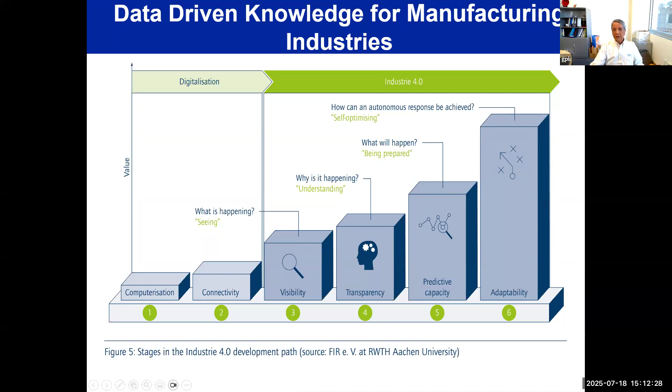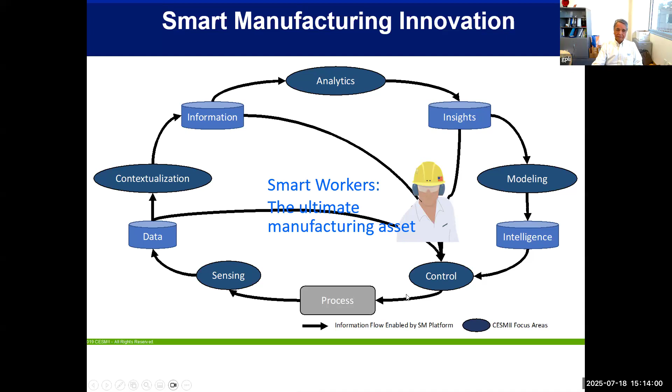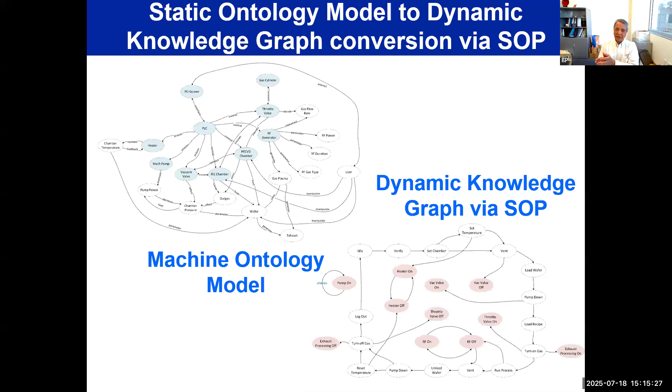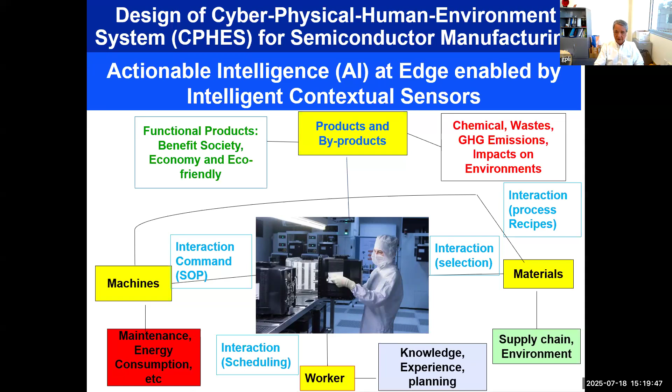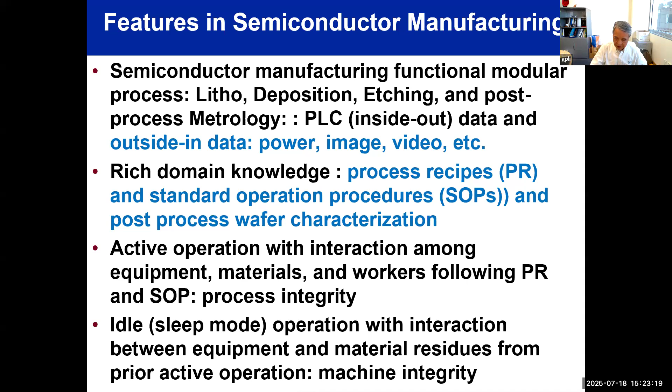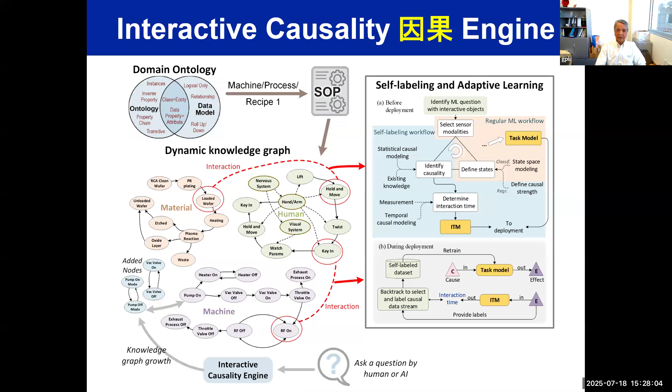And by labeling the data, self-labeling, we can see repetitive anomalies to generate an additional knowledge graph. So this is really a regenerative knowledge graph - it allows us to discover the growing, emerging nodes in the process as a result of some condition change. This has never been done before for the first time. At the same time, because we are able to extract the time information, that time information becomes another asset in manufacturing. So that's a deeper dive into self-labeling without experts.

How does that happen? As shown here, because we have translated the ontology into a dynamic knowledge graph, we can define the state machine. So what we have is, by defining the threshold, you can see when there is a state-observed effect change above the threshold, we say that is a cause event. Then we see what is the effect we can measure or observe. By noticing the difference between the cause state and effect state, we can define the interaction time. So this is how we define the interaction time, using the self-labeling.

Let's put an analogy to human health conditions. We can measure the temperature, say every 10 seconds you do a sampling - that's an event, right? So you see the temperature, and now it's 36.5 degrees C or 37.5 degrees C. It's random - every 10 seconds there's an event, you see the data.

But when you see the event happen is when the temperature is greater than 38, you know something is triggering - that is the cause. Now you're looking for the effect. If someone is coughing, that is an observed effect. So what is the incubation time? That's the interaction time. This is just an example of how we do the modeling of a causal time lag.

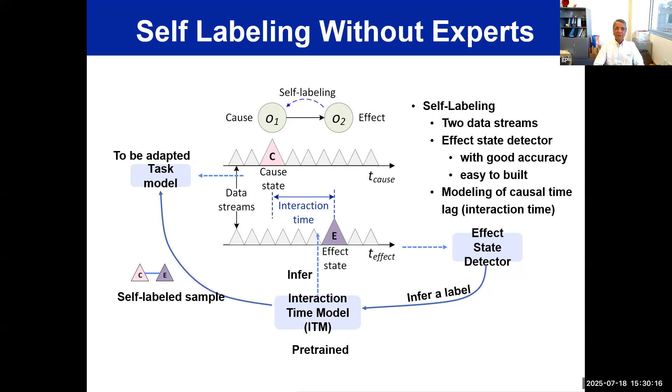To really ground you with understanding of this causal self-labeling technique, most process engineers are very familiar with process development with design of experiments. So the cause state is the PLC sensor data - we see what is the pressure, what's the temperature, what's the RF power, what is the gas flow rate, what are the gases, and so on.

Those are just five different streams of data. And the effect is we're using online metrology detector to measure uniformity, thickness, and vertical sidewall. So we can model this causal time lag based on the SOP - this is something most process engineers understand.

But under the AI model data stream, without the expert involved for self-labeling purpose, now we can establish interactive causal events. The cause event is equipment being in active mode or idle mode - those are state changes. And whether there is human-machine interaction because something wasn't done properly and humans step in or observe something new to provide that information, along with the PLC state and SOP event and so on.

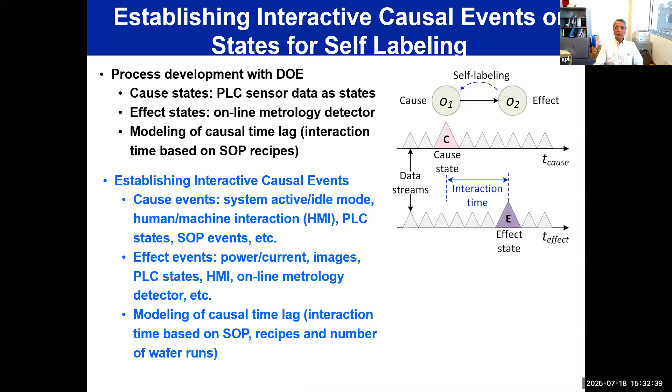Now, when we are dealing with the modeling of causal time lag, the interaction time is based on the SOP, recipe, and number of wafer runs. It's not only the SOP and recipe - the number of wafer runs matters because the wafer run could be executed at a different time, so there's a different time lag. Those are the information we want to capture as a way to really provide the self-labeling.

By doing that, we can develop the AI model in a cyber physical system. Because we are using interactive causality, that interaction causality really provides us with contextual learning. The data now is not just raw data, it's not just information - it has contextual information, the causal relationship.

And it's based on the interactive relationship we define in the dynamic knowledge graph initially, and it grows over time as we run the wafer run. It is also based on rich domain knowledge from the recipe and SOP developed by equipment engineers and process engineers, to identify sensors and classify their data for doing machine learning and to create an AI model.

One thing we also notice in this defense electronics is we usually have a very limited pre-allocated data set for model training in diverse cyber physical system environments. Because of this, interactive causality can allow us to shrink the number of data requirements initially, allowing us to grow by the self-labeling technique.

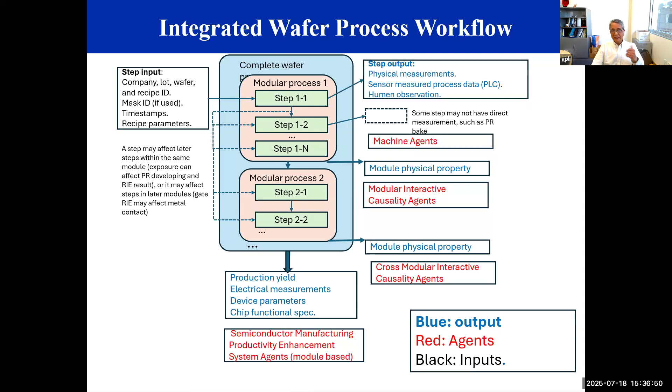So here is the example how we are dealing with a machine agent to allow us to find the anomaly in performing the task, as well as to determine remaining usable time of the machine. So this is a step input to the machine and step output sensor data, going through our machine agent learning, as I just mentioned, interactive causality and self-labeling. So we can detect the deviation and detect out of range anomalies.

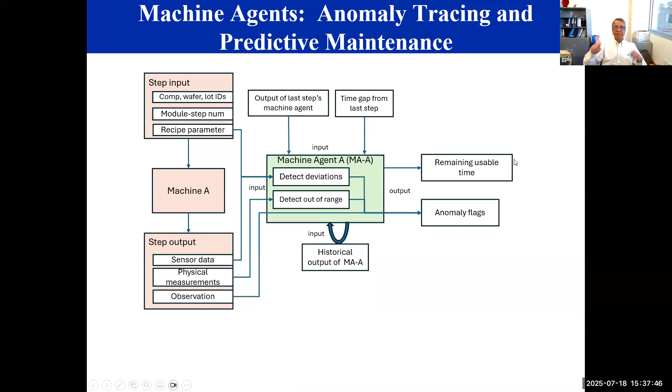Then we can also compare with the historical output of a machine agent in machine A. So here is the input to the machine agents - the time gap from the last step and output of the last step machine agents. So this interaction is built into our machine agent for the model development.

Now you can see a machine learning information flow of a modular process. Now you have machine agents for deposition, for litho, for RIE etching. And so now, how one modular process can affect another modular process and so on. So now we can look at the interaction within an integrated process among different modules.

This is really taking a holistic view of integrated circuit manufacturing, because it consists of so many steps, and we partition them into modules, and each module's interaction can be developed through this interactive causality.

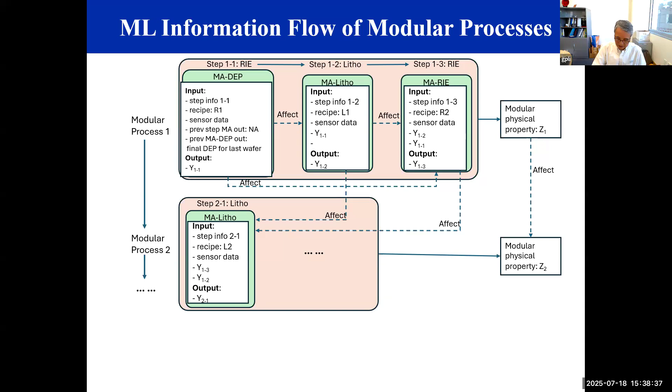So this is how we are using this machine agent as we presented previously for deposition, litho, and RIE, and for the machine agent output anomaly, to have the interactive causality agents update the knowledge graph as well as identify the new causal time series between the wafers and within the different modules. So this is how we extract this information from the data stack.

So with that, now we ask ourselves - now we understand how we can do the AI model development and the data stack for machine learning - how do we select the sensor for doing the machine learning, as I mentioned earlier, for the interactive causality? The goal here for sensor selection is to complement human five senses and human intuition.

Typically we have an existing timestamp PLC data log used in automation control. This is based on active process control to meet the process recipe and SOPs. And video camera is the security camera inside the fab - to me, it's like a wingman observation, the interaction between human and machines.

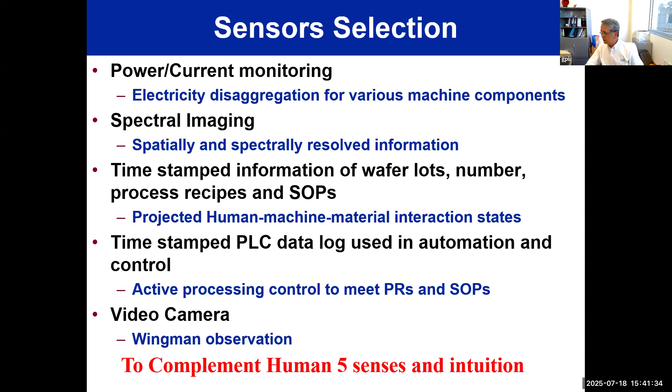So once we have that, as this additional sensor, now let's see the machine learning pipeline, how we do that.

I'm using one example of the RIE etching system we perform in our systems. So before the wafer processing, we do oxygen cleaning of the chambers, then start wafer loading through the load lock and perform the etching. And when it's done, there's wafer unloading, and you perform another oxygen cleaning and the machine goes into idle mode. So this is active mode, this is idle mode.

So following the workers' interaction with the machine through the SOP, and the recipe interaction between machine and material happens in the etching. So now we have the data collection: PLC data from the equipment and also external environmental data, power fed into the equipment. Also the hyperspectral image to observe what is happening inside the chambers. Then after wafer unloading, we do the metrology characterization and also perform the standard oxygen cleaning.

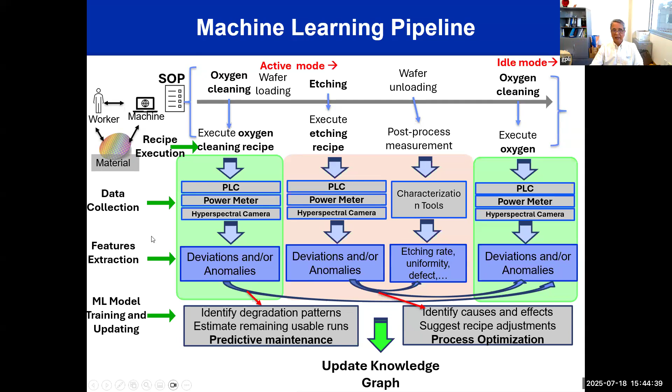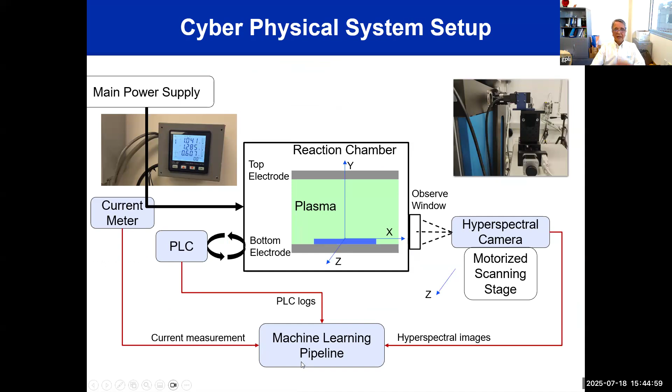And this is the AI infrastructure in manufacturing. Very different from current generative AI. We have this additional data collection interaction in addition to simply the computation resources. And this is how you can set up an example with the hyperspectral camera and the power meter connected to your process equipment and the PLC data. And this is the data stream and how we perform the machine learning pipeline.

Now I'm going to give you 3 examples of the application. First is AI-driven plasma process monitoring. Right, so here is typical background information about reactive ion etching; plasma is used in deposition, etching and surface activation. Equipment performance degrades over time due to residue buildup, component wear, and electrical drift at high power. Traditional monitoring is basic data, and it cannot capture the subtle change.

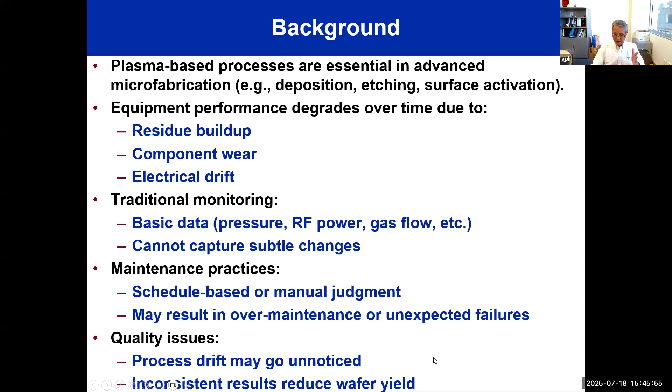And maintenance practice is schedule-based or manual judgment by the engineer, so it may result in over-maintenance or unexpected failure. The quality issue is that process drift may go unnoticed, and inconsistent results reduce wafer yield. Right, so those are the typical issues we heard from working with engineers. And so, what are the opportunities here?

Modern plasma tools generate a large volume of heterogeneous, unstructured data, and the signals are noisy, weakly correlated, and buried in the background drift. Traditional rule-based systems struggle to interpret complex patterns, and human operators cannot manually track all channels in real time. There are so many different streams of data to track that it is very hard to do.

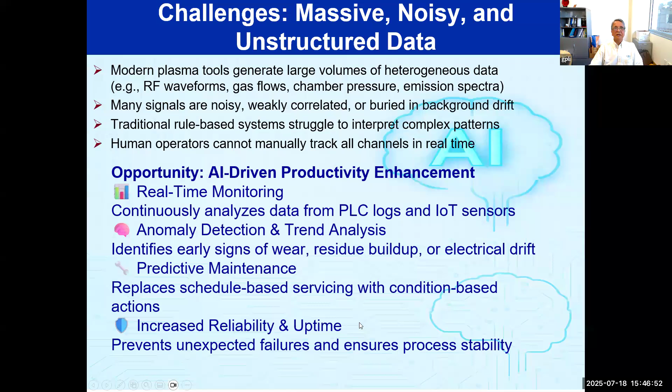So the opportunity is AI-driven productivity enhancement: real-time monitoring that continuously analyzes data from PLC logs and IoT sensors, as I mentioned, and performs anomaly detection and trend analysis so that we can do predictive maintenance and increase reliability and uptime of the equipment. Right, and this is the system we use, as I mentioned earlier, for this prototype demonstration of RIE systems.

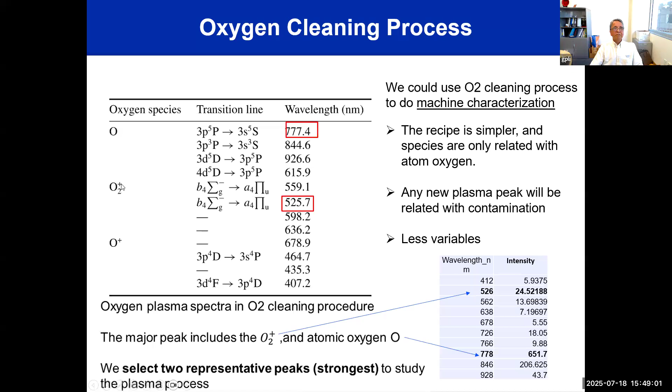So the oxygen cleaning process is used for self-diagnosis of the RIE system during idle mode, because for machine characterization the O2 cleaning recipe is simpler, standard, and only related to atomic oxygen. Any new plasma peak will be related to contamination residue inside the chamber. So here we pick two wavelengths for the analysis, O2 plus and atomic oxygen, because they have high intensity. Shown here, we focus on one point and look at the time-lapse data of this oxygen and O2 plus.

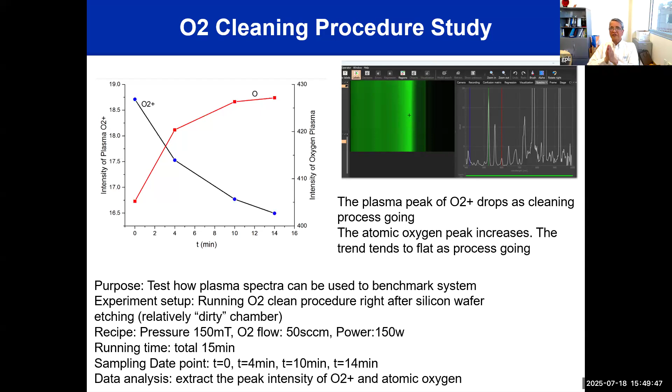O2 plus. So what you can see here is initially the O2 plus is performing the etching, and when that condition is improved through the cleaning process, the yield of the O2 plus is reduced. Okay, so this is really telling you from this time information how you need to design your recipe for the cleaning to ensure the integrity of the machine so that your process integrity can be maintained.

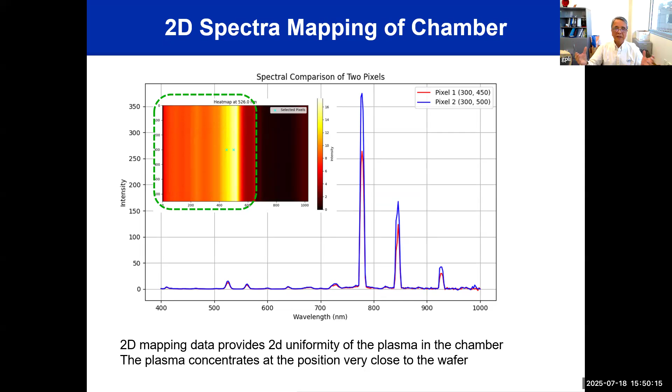Right, so now we can do the mapping along the wall of the chamber. So you can see here, this is at the surface of the wafer towards the anodes. So what you can see here is at a different location, it has a different plasma intensity. Right, so now you can look at either across the wafer or along the chambers, giving you the uniformity information after any given active process.

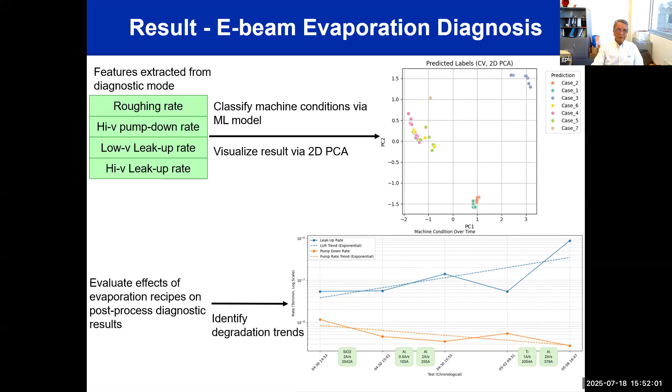So here is another example, the e-beam deposition system. And we can first categorize for the e-beam deposition and see how the process chamber exposed to different environmental conditions may impact the leak-up rate of the chambers. And also showing here is how different depositions, silicon oxide, aluminum or titanium, change the leak-up rate and pump down rate of the chamber so that we can predict the integrity of the equipment when we need to do the predictive maintenance. And this is done by self-diagnosis.

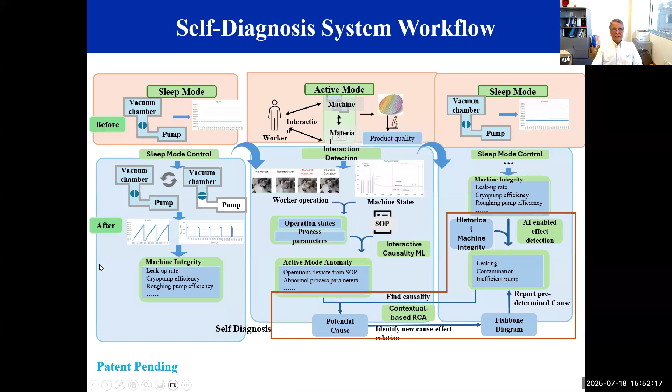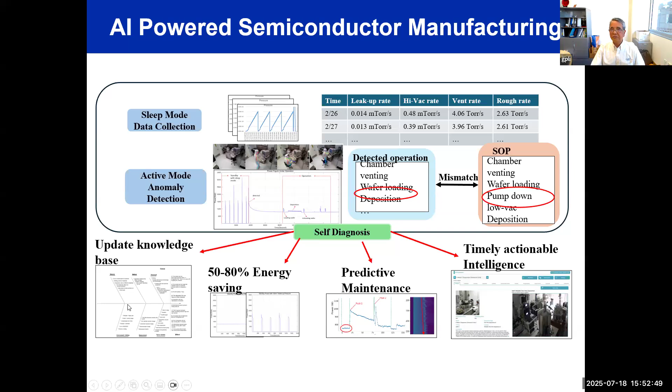As I mentioned earlier, we divide into sleep mode, idle mode, and active mode, and go through this machine learning in both sleep mode and active mode. And we get the information about the predictive maintenance of the pump, and we know when we can really slow down the pump speed to save energy and also provide actionable intelligence to the workers. And this is done by doing the comparison of the data with the failure analysis of the fishbone. So that gives us that updated information.

So the third one is AI-driven scalable workforce development. So this is using this interactive causality, and we use the machine learning, so-called OpenPose, by extracting the skeleton of the human working inside the fab and their interaction with the equipment, so we can predict whether they have loaded the wafer properly because of orientations, whether they follow the sequence of events to operate the equipment, and whether they are using the right SOP or recipe, as a way to capture the mistakes they might have made.

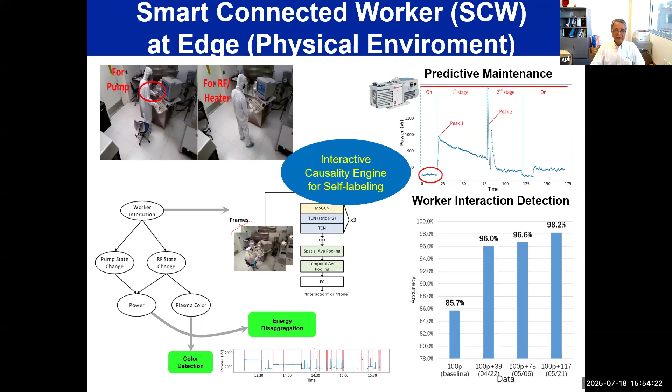diffusion pump, it has a first stage and second stage. The time lapse also gives us the information. We can track how the cleaning, how changing the oil of the diffusion pump may change. There's a time lapse as a way to do predictive maintenance, right? And this is really based on the energy disaggregation we're able to do.

And we also convert the whole thing into virtual reality with the AR, VR platform, together with the contextual information for virtual training content. So this is really scalable. It can really allow people to experience in a virtual environment, just like a flight simulator without flying the airplane.

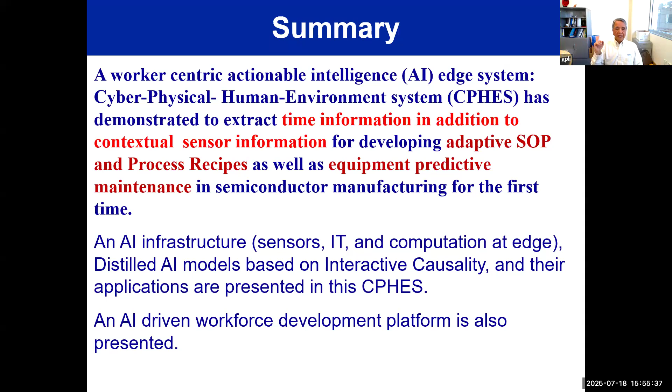So in summary, a worker-centric actionable intelligence AI edge system, cyber physical human environment system, has demonstrated to extract time information in addition to contextual sensor information for developing adaptive SOP and process recipe, as well as the equipment predictive maintenance in semiconductor manufacturing for the first time. And AI infrastructure, sensor, IT, and computation at the edge, distilled AI model based on interactive causality, and their applications are presented in this cyber physical human environment system. And an AI-driven workforce development platform is also presented.